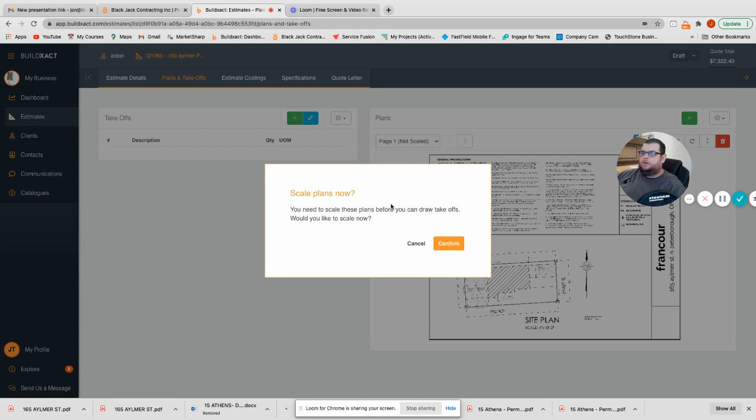Okay, so now that the plans have uploaded, we have to scale them, just because drawings come in different measurements, so we have to make sure our point and click system is doing the same measurements the drawings were designed in. So I'll press confirm. We want to find the main page with the drawing.

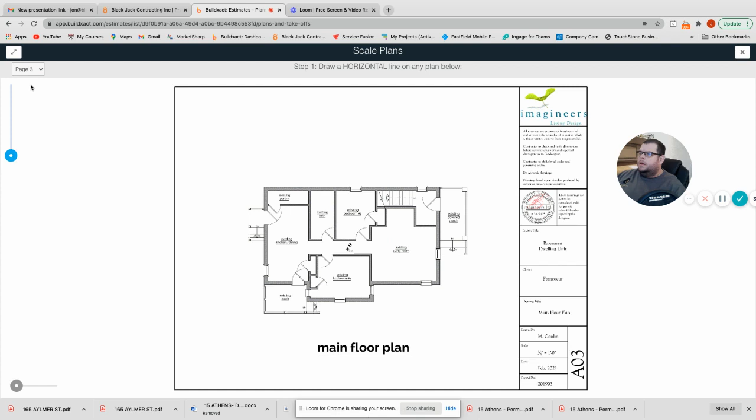Now this is the main floor plan. So what we're going to do here, and I'm not sure, to be honest with you, what the X is about, since I've never seen the drawings before. I'm just going to keep playing here till I find the ones I want to use.

I'm going to go back to page 2. Okay, so I'll scroll to make myself bigger here, and we're going to take a line. We're going to find the easiest line with a simple measurement.

Okay, so what I've done here is I've typed out the measurements that I want to capture off the drawings. So each one is done in its own measurement. Most of them are by square foot, some are by the linear foot, and some is each. So we're just going to do framing together first to give you the idea of how it works.

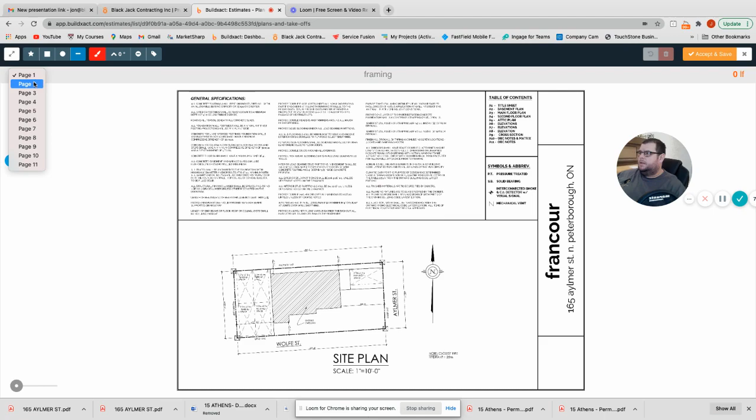So I'm going to take the takeoff tool here and find the drawing that we're measuring. Okay, so this is our drawing. This basement is being completely redone. Nice thing about this basement, it's an old building, it's a two-story, but this basement has 10-foot ceilings, which is awesome because it's going to make a beautiful ceiling. Because we're even going to drop this ceiling down to hide all the mechanical, so it's going to be a pretty even surface. But first thing we're going to do is we're going to measure the wall framing.

So when you have a wall, we're using the line tool here. It's pretty cool, I'm just going to click on the first corner, drag it to the next corner. So we know that this wall is 36 feet 1 inch long.

So I'll do all the outside walls first. All right, so we know that the total outside perimeter is 112.4 linear feet long, so then we have to do the interior walls. So we only have to do one side of the wall once. We don't have to do both sides because otherwise that'd be counting for double the lumber.

This wall right here, we can go all the way across to this load point here. And then we'll do the closet. Now the closet, we do have to do the framing because of all the framing above.

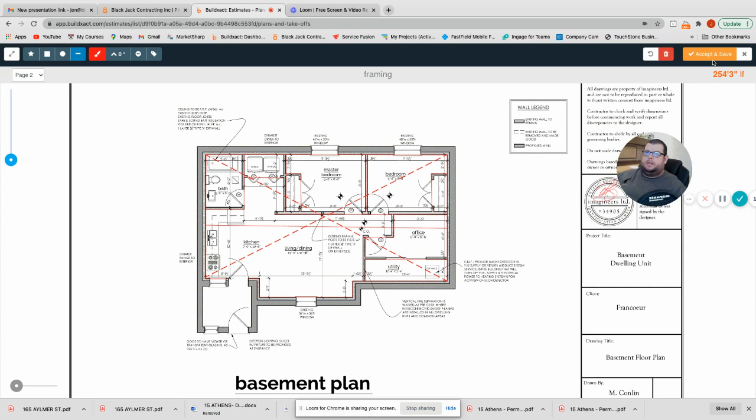Even though it's showing as a linear wall, 8 feet of lumber, because you're going to have two sides, it'll eat up the lumber. So once I'm happy with the framing measurement here, I'll click accept and save, then we'll move on to the next thing.

So I'm going to show you the sound insulation because it's a different type of measurement. I'll go to my takeoff tool again, and this one's going to be done in square feet.

So this designer has decided to show a utility room that's not fire rated. I'm going to change it because otherwise I have to do the ceiling, which is quite challenging. When you're fire rating a utility room, the walls get fire rated, including a door. So what I'm going to do is capture all this in here, that's the insulation that goes inside the fire rating.

I'll click wall, and I know I have a 10-foot ceiling, so I'll make it 10-foot height. What I do is just drag around this room here. I do not have to do the foundation wall. So I know I have 188 square feet of insulation to go around these walls.

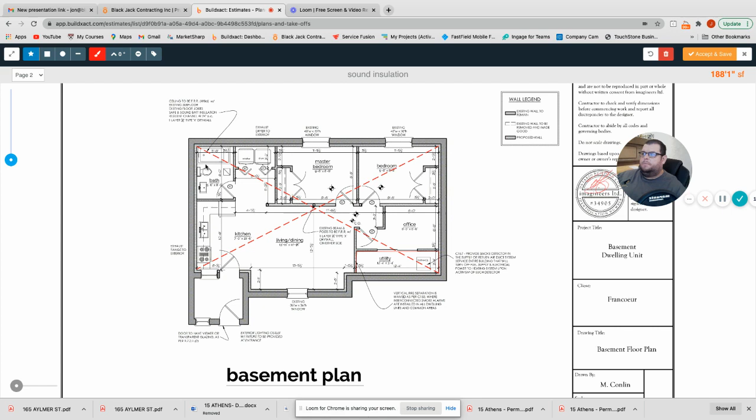Then I'm going to go to the polygon, which is going to capture the ceiling. But I said I'm doing the walls here, so I'm not doing the ceiling, so I'll skip that. I just take my polygon, drag it across, and I'm going to skip the furnace room.

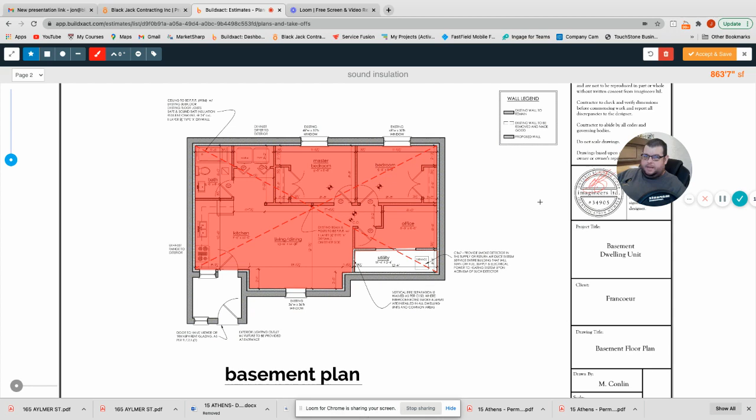And voila, I'm done. So I know that I need 863 square feet of sound absorbent insulation. That gives you the basic idea of how I'm going to calculate this whole thing, so I'll go through it.

Now I'm doing half-inch drywall, which is going to be used on exterior and interior walls that are not fire rated. Now, other than the framing thing, I do have to count both sides of the walls when I do this.

Okay, now that I've done the half-inch drywall, we're going to do a calculator here because there's always wastage when it comes to drywall, and it's usually about 10%, so we'll go 10% wastage. Click accept, and it's going to do the wastage for you so I know how much drywall I need to order. We'll do the same thing for the 5/8.

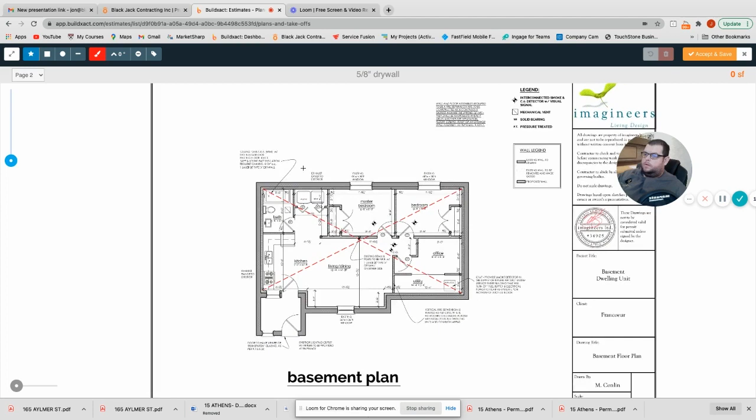Because I'm choosing to rate the furnace room walls instead of the ceiling, there's going to be a different assembly here. There's going to be 2 layers on one side and 1 layer on the inside.

Okay, so now I'm doing the interior doors. I have each tool on, so I just point and click. I have 2 doors here, 1, 2. This one I'm changing to a fire door, so we're just going to go click, click, click, click, click.

So I know now I have 9 interior doors to count for. I know I only need 1 fire door. And I'm going to count the window space.

So now I'm trying to calculate casing. For around windows and doors, doors are always 35 feet per opening, and windows we average out about 25 feet per opening. That's 4 sides.

Now for the door, it's going to be both sides, 17 feet a side with a little bit of waste. So I'm not going to actually use the point and click here.

So now I know I have 1, 2, 3, 4... sorry, 5 windows. 5 windows at 25 feet is going to be 125.

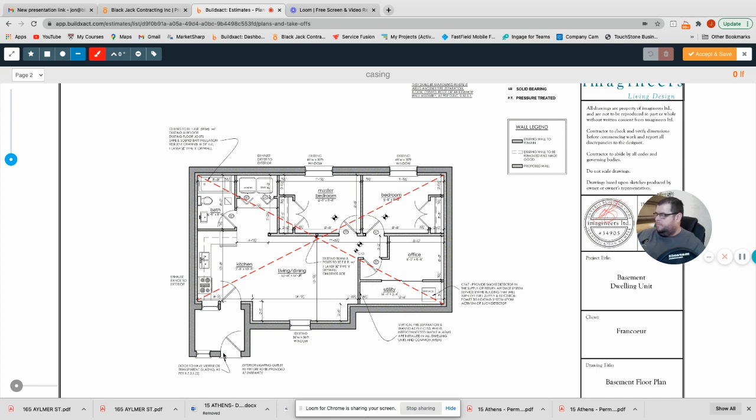Now I know that I have 1 fire door, 9 interior doors, so we're at 10, plus an exterior, so I have 11 doors. 11 times 35, which is, I don't feel like doing math today, 385, plus 5 window openings at 125.

We know we have 510 linear feet of casing.

Baseboard and shoe measurements are a little more of a challenge. We have this point and click tool we're going to use, but it's a lot of clicking, so bear with me.

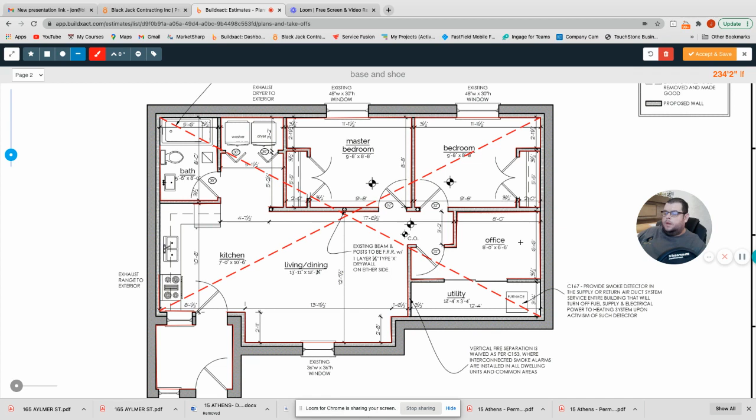Okay, so you can see I did all the clicking there. This one's the most pain in the butt part about the whole process. We've come up with 234 linear feet of baseboard and shoe. That was the tough one, so we move on to the next.

Okay, so we've pretty much done our takeoff here. These are the key measurements I need to know to start producing the estimate. Now, this only starts to tell you one part of the story.

There's a little bit you can't really get off drawings, the existing conditions. This house has had a lot of work done to its previous two floors, so there's some messy work in the basement done by previous people that has to be cleaned up before we can go on to our part. So I don't ever recommend just trusting a pair of drawings to produce an estimate.

I think that's where problems could lead to, and as I talked about in other videos, we want to try to avoid problems in the contractor relationship the whole time. Make sure you get a site visit. Make sure you identify problems so you can estimate repairs with them, so the homeowners or the investor isn't surprised by additional work, because no one likes that.

Other contractors out there, make sure you do your due diligence. Give them an all-in-one price. Don't try to hit them up at the end because you forgot this or forgot that, because no one likes that, and that's how bad situations arise. We should have happy customers and happy contractors.

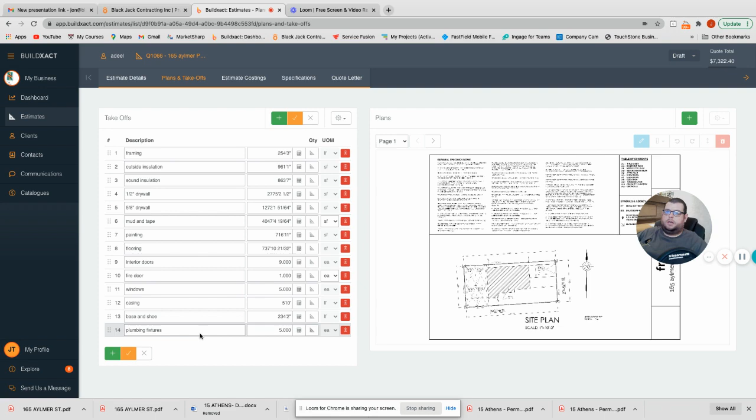So I got my takeoff over here, and then we're going to start typing out the estimate here. I have a little bit of a template built for myself because I do a lot of the same type of projects. I'm actually coming up with a new system right now that's going to make it even easier.

To allow customers to actually pick upgrades without me being involved, just from the computer. You can take a look at it. It's going to be pretty cool. I hope to have it running in the next couple of weeks, but for now, this is what we're using. So basically, this is Knowify.

I showed you guys Knowify in the last video. For people who haven't seen it, this is a contractor financial system that helps run projects a little bit. So this is where I'm going to actually build out the estimate, and this is where it will be sent to the customer.

So first thing I'm going to do is just name the project. I'm going to name it by its street name.

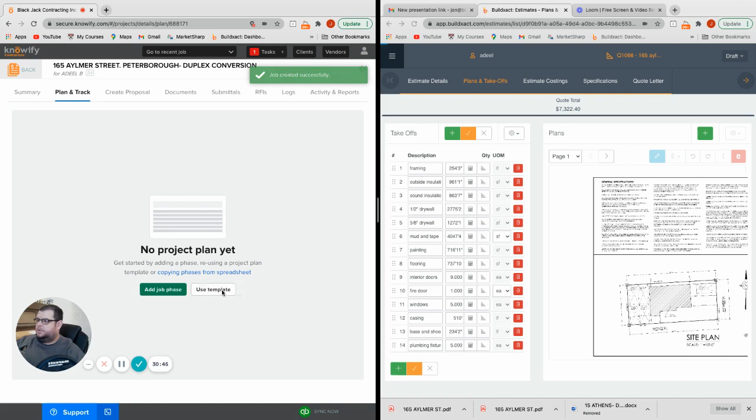Okay, so I'm going to use a template here. I'm going to use one from a previous project that I built that has most of the stages I need, and I just apply the template. Now it's bringing up numbers from a previous project here, so I'm not going to go too far into it. But basically, this is how we do an estimate.

All we're building out right now is costs, not what we're charging the customer. We're just figuring what we believe our costs are going to be. So this basement is pretty much demoed.

We're going to have a little bit of demo throughout the project, and you're going to have the waste. So I think I'm only going to need one bin for the project, and I know it's going to cost me $490. Disposables, I'm just going to put in two of them throughout the project. That's bags, products, all that fun stuff. And this is disposal fees, so when you don't have a bin, we're just going to be dropping it off at the dump, that kind of thing.

So I'm pretty happy with that. And I think I'm going to dedicate about 16 hours to it based on what I've experienced. Unfortunately, some of it is a guessing game. You do your best. I'm going to dedicate 16 hours. So I know my cost for demo and disposal for this project is going to be around $1,140. So then we go to framing and structure.

So now, as you can see here, I've got pre-typed in materials, and then I do my labor down here. So I know that I have framing, 254 feet of wall here. Typically it's about a stud per foot, but you still have to do back framing and bulkheads like that. So I believe I'm going to need 296, which is a lift of 2x4s.

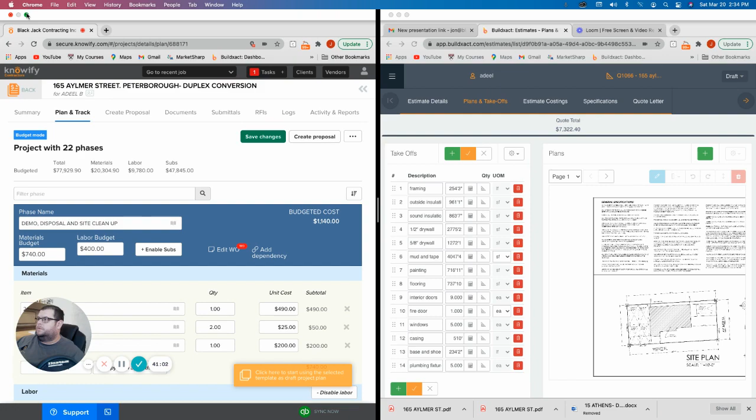So now after we've done all that, I no longer need this section right here, so I'm just going to go full screen right here. And I'm going to create a proposal.

I'm going to use my project plans. So I know I have costs right here, and this is where I'm going to add my markup and profit. As I said in the last video, the markup range is 38% gross profit, which covers 25% gross margin for overhead expense and 13% overhead gross margin for net profit.

So all I do is go right here, and then I'm going to mark it at 62%, which is the same as 38% gross margin, and I'm going to apply the same markup for all the same items. So now, as you can go right here, this is giving me a breakdown. I'm going to charge the customer $126,000 plus the taxes. And that allows me to cover all my overhead expenses and make a 13% net profit.

So now that I've done all these numbers right here, now I have to type in the scope of work. I built out some things, but I need to change them because each project's type is different. And then I'm going to add my contract terms and payment schedule so the customer can review. So what I'm going to do now is type in all the details, and then I'll bring you back when it's time to show you the official estimate.